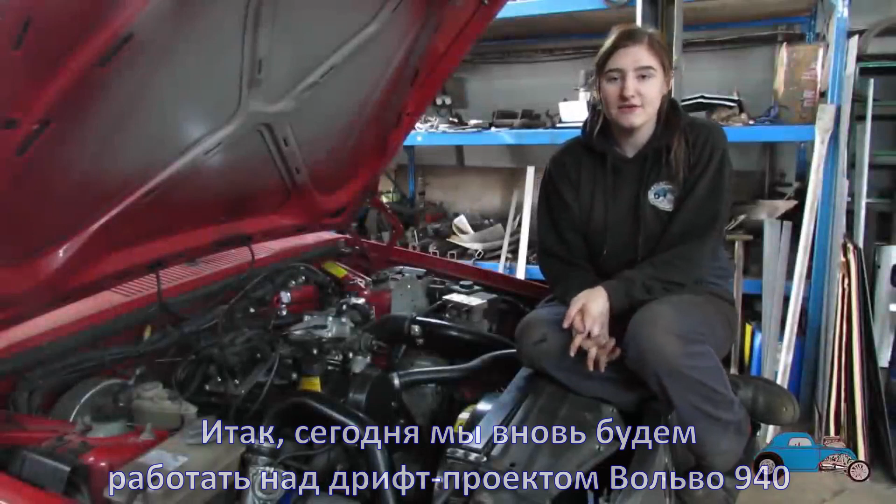Hi everyone, welcome back. Today we're going to be working on the Volvo 940 drift car again. You might have noticed I haven't been in many of the recent videos - that's because I've been working on my own race car project, and I also had to take some time off work because I caught COVID. So finally I'm back in the workshop working on the drift cars and projects again.

Today I'm going to be sorting out the breathing system on the Volvo, and Dad is going to be sorting out the suspension. We're also going to be fabricating our own lock kit for it. We were going to buy one - Dad will probably explain this later in the video - but we decided that we'd try and fabricate our own. That's one of the things we're going to get on with today.

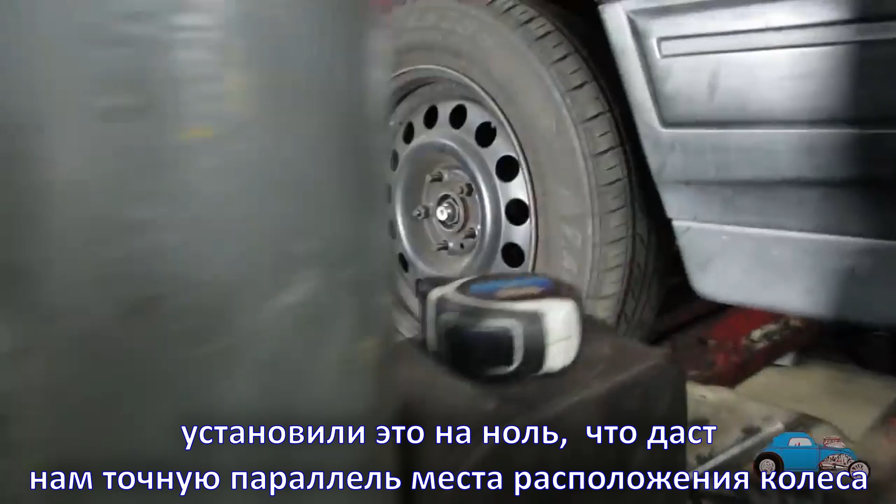Okay, we've now straightened the wheel. We've got it on the turn plate. Set that to 0, and that will give us exactly dead parallel for where the wheel is.

Now, I've already extended the track rod on the rack fully out to its full extent, and standard is 35 degrees. We need to be getting about another 10 degrees on that, so about 45 degrees of lock, which will help while we're drifting the car.

So with my plate, I can now put this over to 45 degrees, and with my plate I should be able to tell exactly where the point of position is, to tell exactly where the track rod end needs to go in.

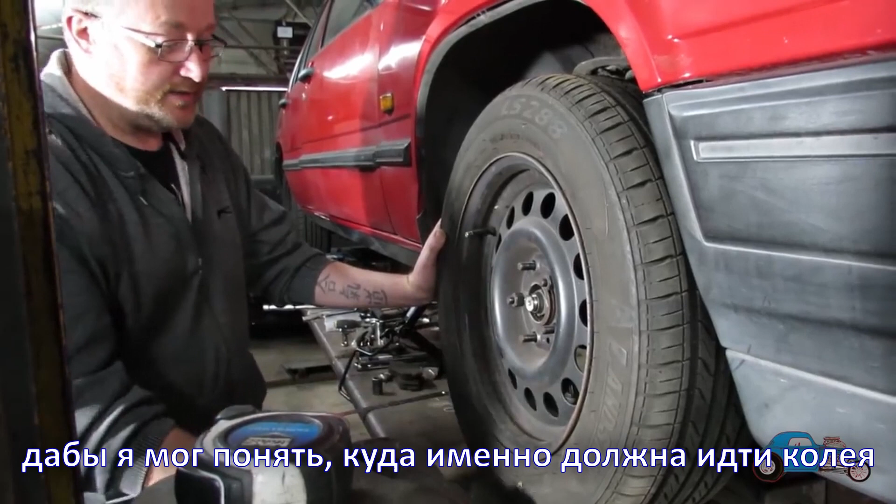So if you watch on here - we've only marked it on there because it's not actually on there. Yeah, the turn plates only go to 35 degrees.

I would imagine, obviously, because cars don't go 45 degrees. Oh, it's for drifting, isn't it? Yeah, so that's standard. That was when I moved it very slightly, and that's 45. So 45 degrees is about there.

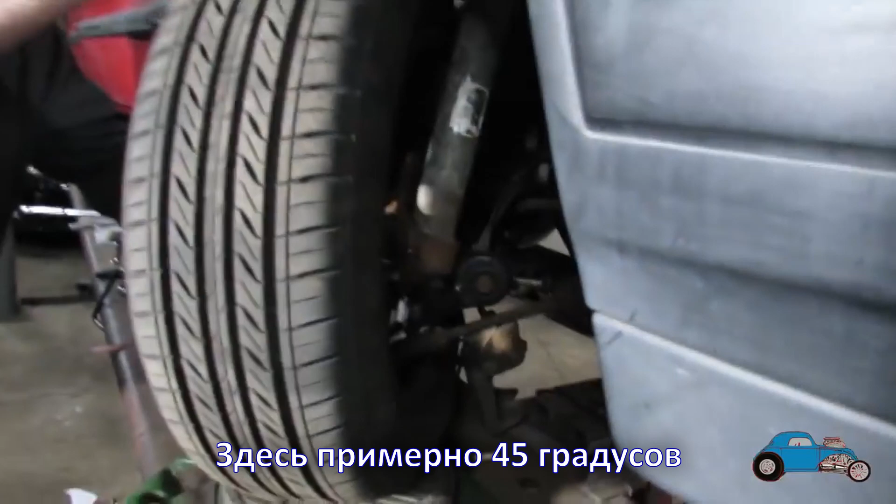And we've already measured the distance, and we've just got a bit of bar that we're just... yeah, so just pop that bar. I can't see anything. Oh, you might have to do that bit. Right, so... is that right? There we go, yep. 45 spot, right - have you got another torch so I can have a look?

Yeah, there is another one. Oh there, got it. Just have a look and see what clearance we've got underneath. That's got good clearance. Yeah, you've got easily about 20-25 mil of clearance.

Right, now do that. You've got plenty there, and then you can just put the track rod end in where that will sit. That should be...

I'll tell you what, that don't need moving a lot. Does it not? No, it don't. Because that's a full extent. You've got to think though, a little bit of difference here is going to make a lot of difference.

Yeah, at the wheel. Then at the wheel, yeah. I reckon that's only... I reckon we only need to move that, what, 15 mil tops? Really? Yeah. But if that gives us the lock that we need, fully extended, then that's where it needs to be, isn't it? Yeah.

So have you got a bit of chalk? Oh, there's a bit, there's a bit there. So I reckon we want to put our... there and there. I actually can't see what you're doing. See that? I'll get the camera in.

So if we make a bush with a tapered hole in it, and then measure that, pinpoint where that is - the centre of the hole - draw that up, then we'll send that plate into the lasers with a hole in it.

And then we'll make a bush with a tapered hole that'll just drop into that hole, and then weld that in, can't we? Or we could do away with all that and do what you said before and do it all on a rose joint. So I did look at that, and we can't.

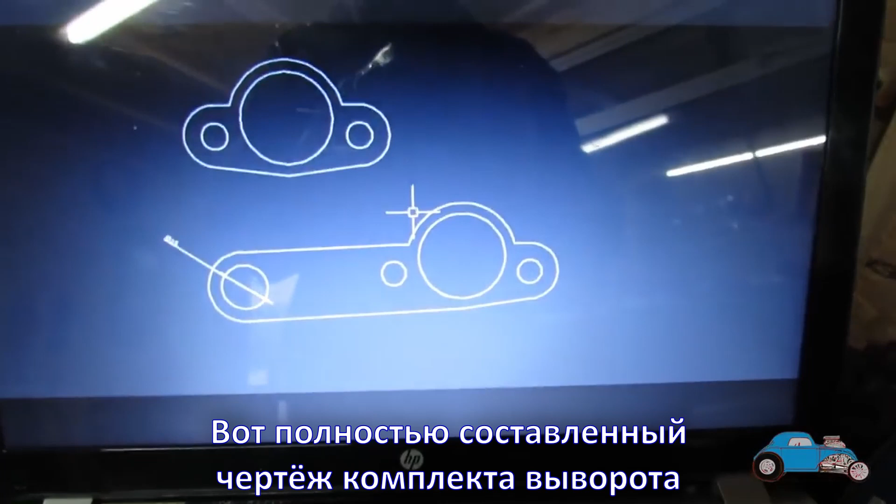That's the lock kit all drawn up. We'll now get that off to the lasers by email. Should get that back within a couple of days.

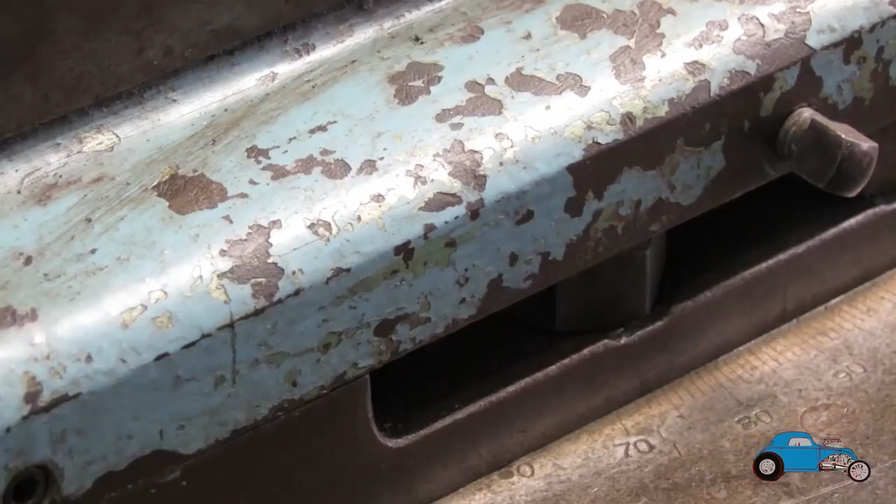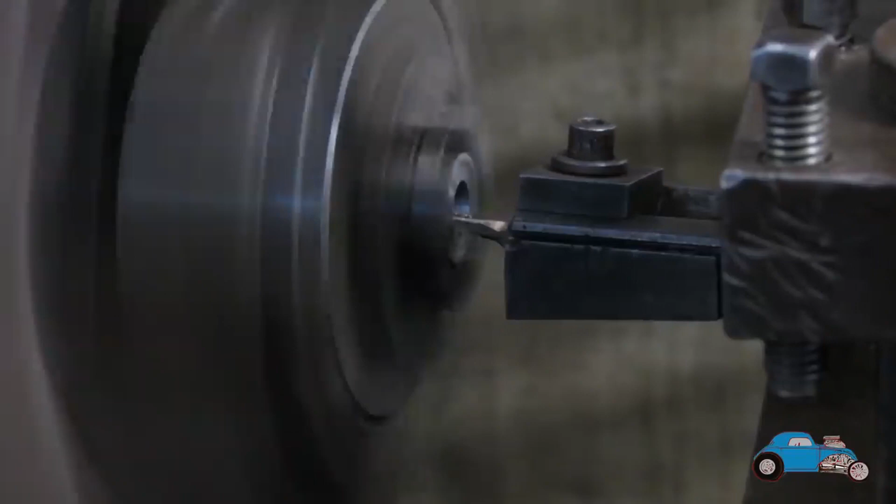Right, I'm now going to weld up the lock kit with the little insert bit, hopefully the right way up. Don't want to be welding it in wrong. I'm just going to get it TIG welded in, and then Dad can get it all fitted back onto the car.

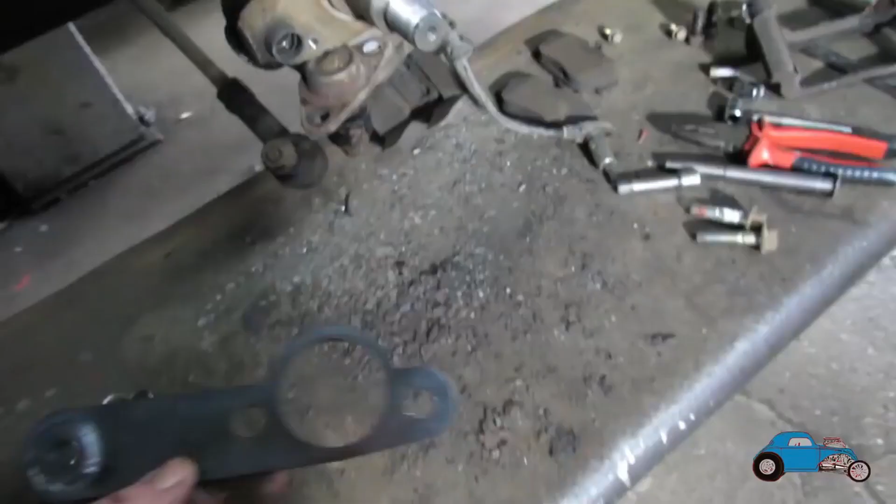Okay, we've now got the steering angle arm all done. Beth has just welded that all in. The boss is to take the taper on the steering track rod end, sandwiching it up between the bottom arm and the leg.

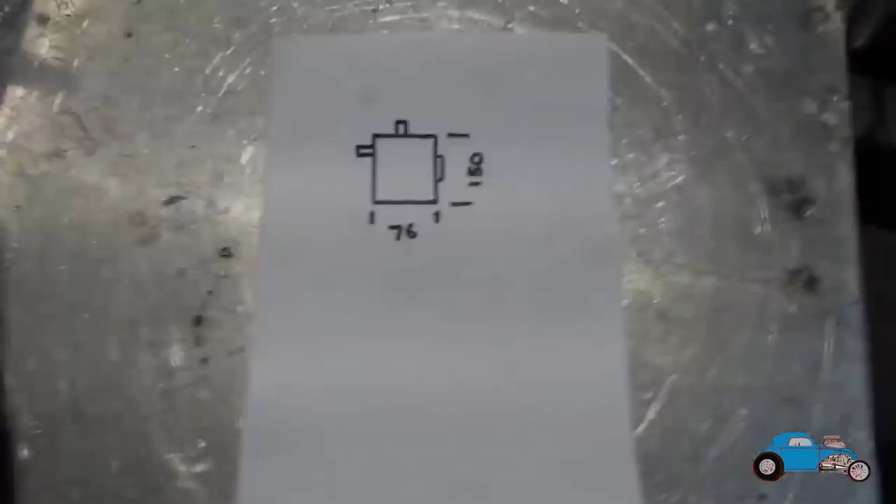I've just made a little sketch of what I'm going to be making today - basically just an oil catch can. I'm going to make it 150mm tall. I've got a bit of 3-inch pipe roughly, which I'm going to use, and I'm just going to cut that off in the bandsaw.

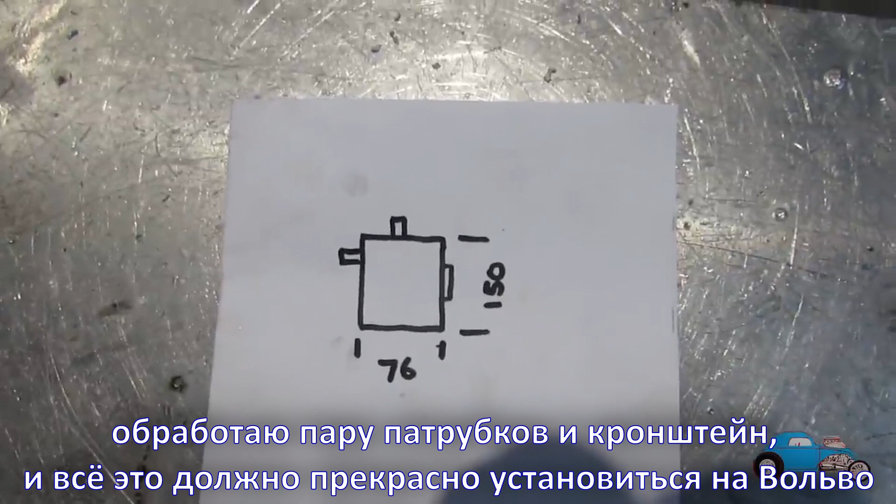Then make a top and a bottom, machine up a couple of pipes and a bracket, and that should all bolt up to the Volvo nicely. And then we can put a little filter breather on the top and a pipe going into the catch can itself.

So I'm now going to cut a bit of tube and then get on with machining and welding it all together.

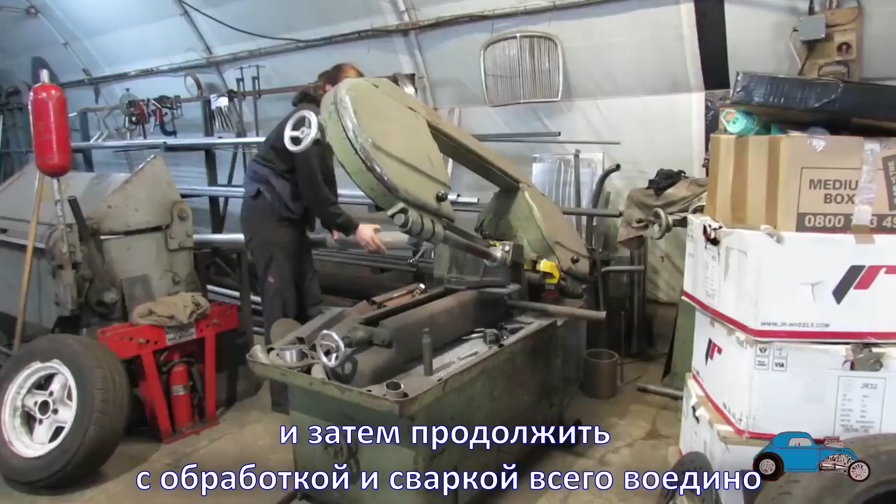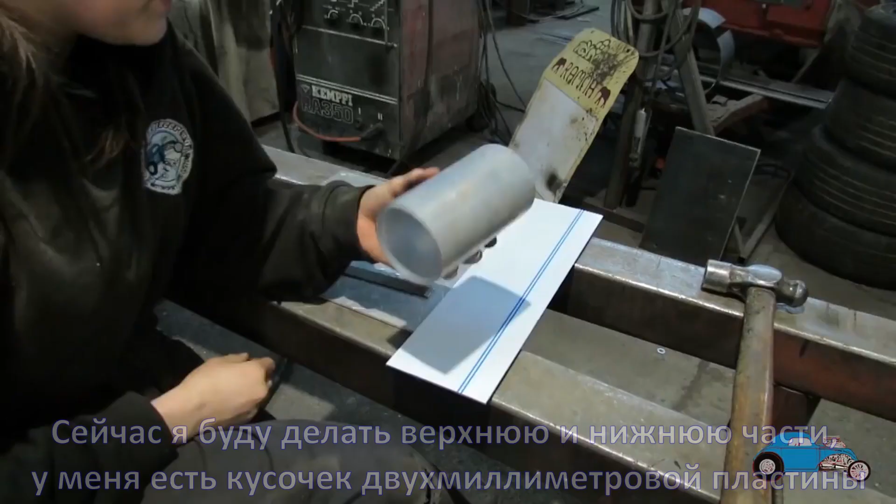Now I'm going to make the top and the bottom. I've got a bit of 2mm plate, so I need to draw a circle first of all.

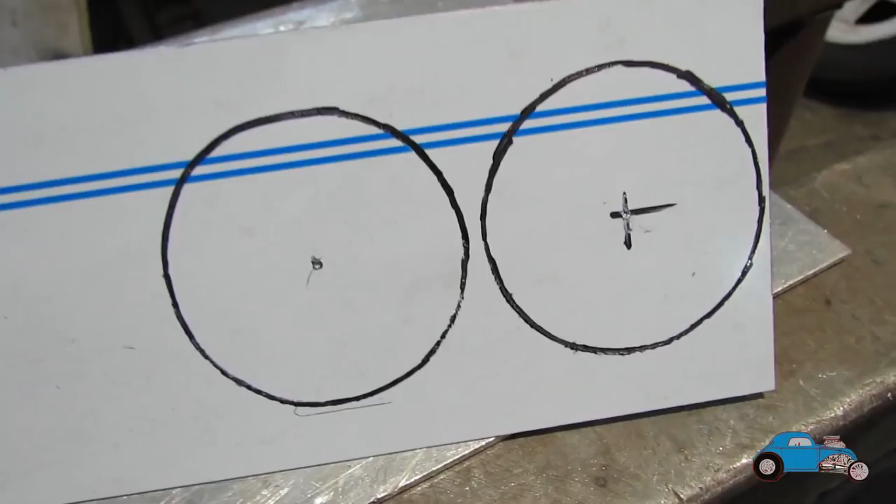Now got the top and bottom marked out, so I'm going to take it over to the guillotine and get these cut out. I've just gone around it with a permanent marker as well, just to make it a bit bolder. It doesn't need to be perfect because we're welding it, but we don't want any gaps around the top, because otherwise the weld isn't going to look very good.

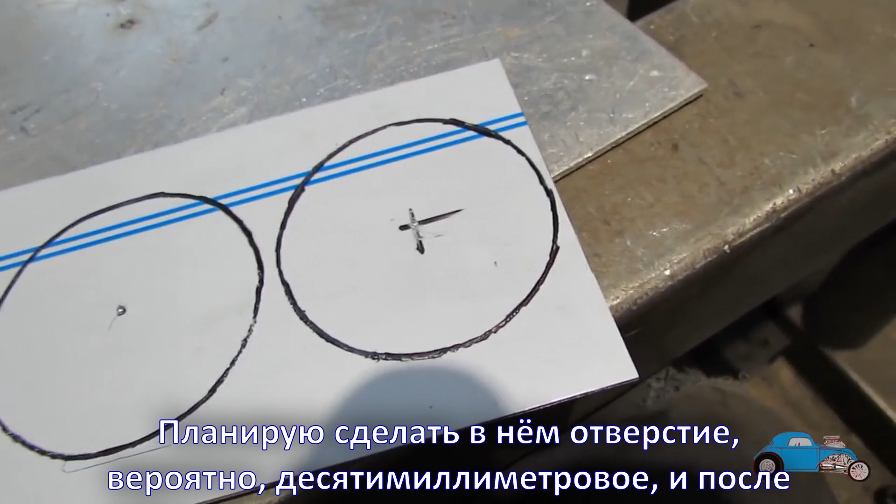So I'm going to get these cut out. That one, because it's got the deepest hole punched in it, I'm going to put a hole in, probably about a 10mm hole, and then if I need to drill it out bigger I can once I've found the right size pipe.

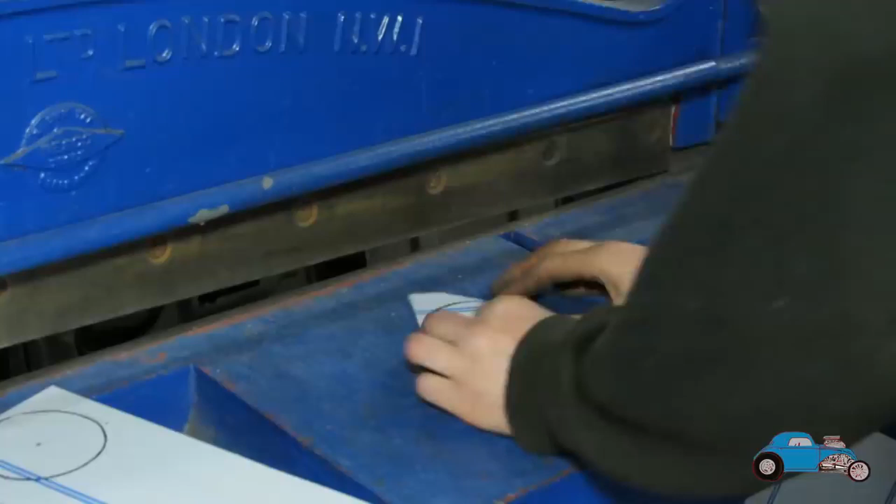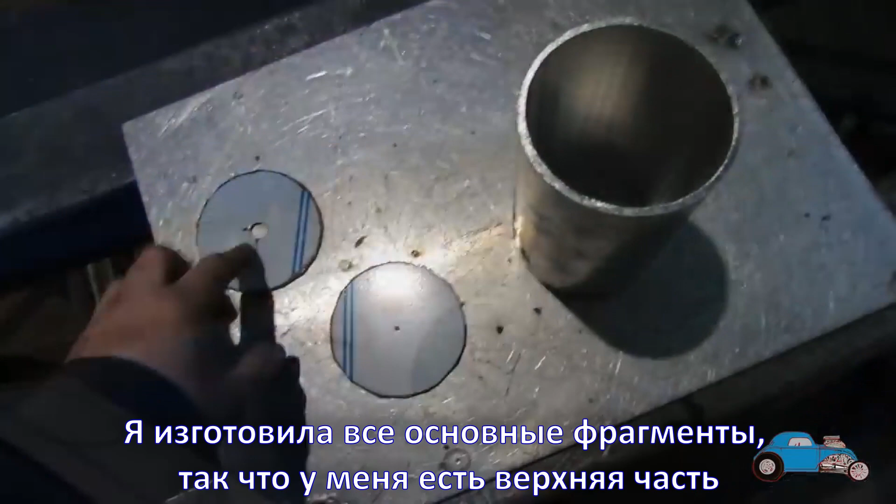I've got all the main bits made - I've got the top. I'm just going to run a sand around that, but that should weld up pretty nicely. So I've got the top and the bottom. I'm now going to get them all welded up, and then we can start looking at machining up the pipes and sorting out the bracket as well.

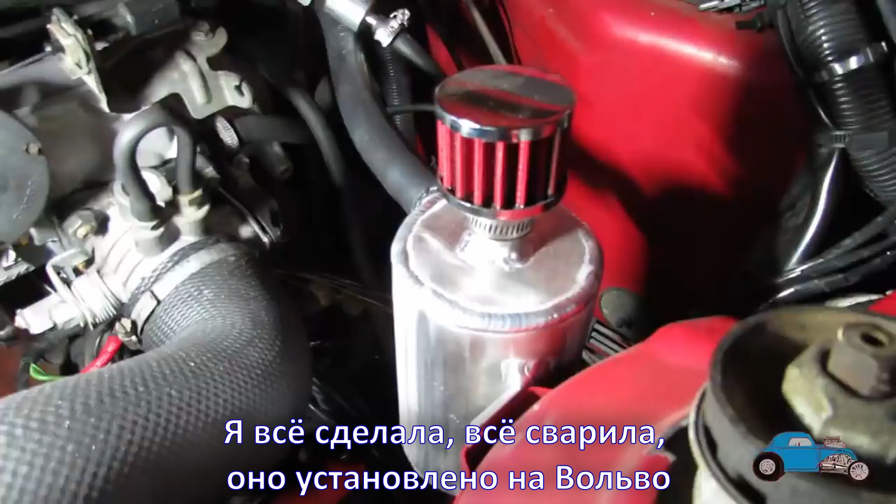So I've got it all made, all welded up, and it's on the Volvo. I've got the breather on the top, the pipe going to it like I mentioned, and then obviously the bracket on the side. I was actually pretty happy with how this welded up.

I think it looks quite good. Probably should have put it in some lacquer or something, because it's only going to corrode, so I'll probably end up pulling it off at some point and sticking some clear lacquer on it, or maybe painting it black or something. I'm not too sure yet, but I'm pretty happy with how it turned out.

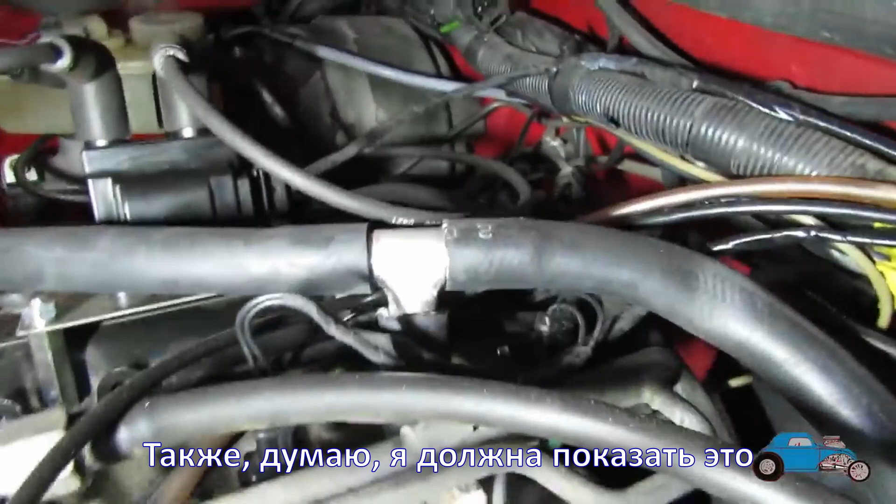I think I should show this. I just made a little T-piece to go from the rocker cover breather, so got that all plumbed in now as well. So I'm pretty happy with this.

So now it's up to Dad to just finish off the suspension, and then it should be good to go.

Right, so that's now the lock kit all on, and that actually gives the wheel quite a bit more lock - basically another 10 degrees more. So looking under here,

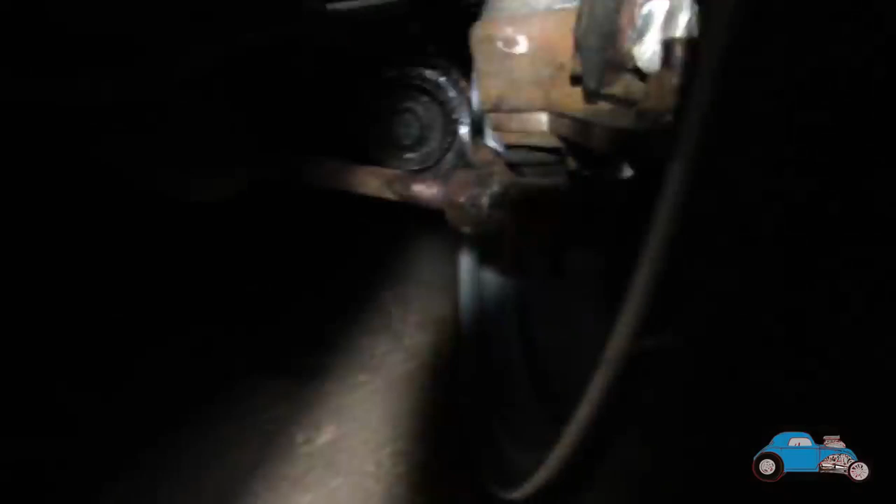just to show you. There we go. That's the lock kit all in situ.

So hopefully that should give us a little bit more lock and help out with the drifting. So that's that side of things done now, and we're getting there, pretty much there now.

So time to move on to the cage, I reckon. Yeah, we have toyed with the idea of putting a cage on it.

On it? In it. On it, in it. Put one around the outside if you want. Not just going to be much help. You what? I said you put one around the outside if you want.

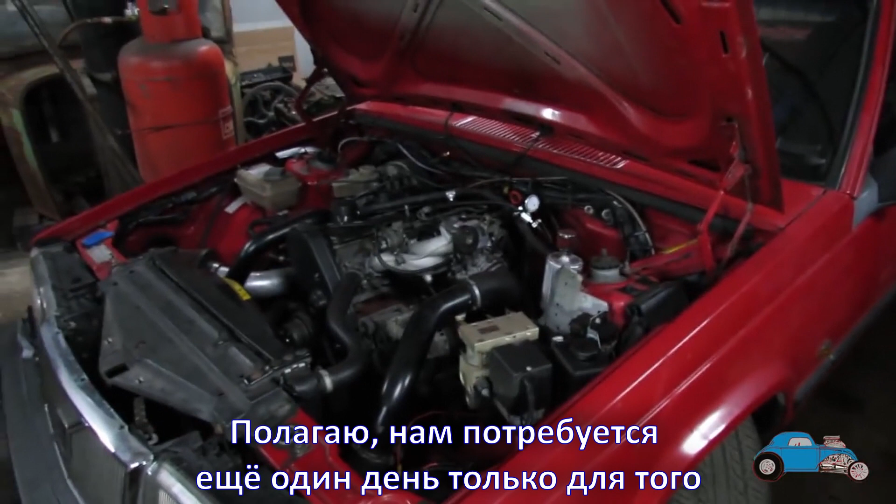No, I think we're pretty much there. I think the next stage is to get this off to the rolling road. Get it tuned up. And get it tuned up. So...